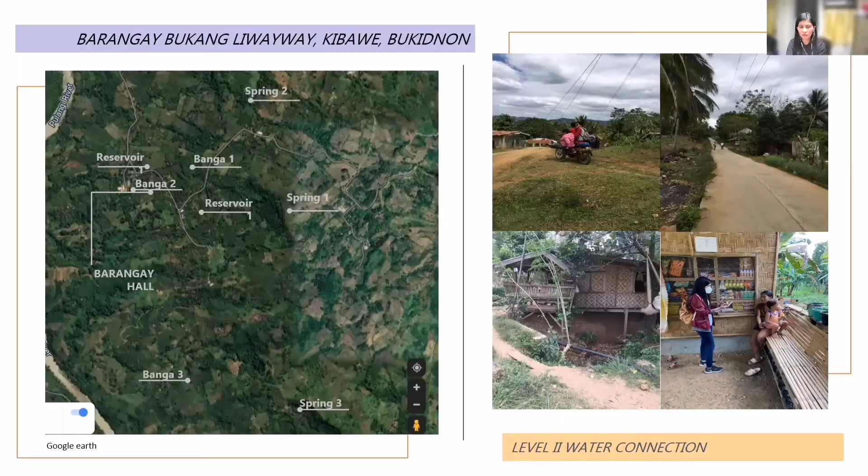To ensure the availability of domestic water in the community, an assessment of the water system is necessary. Bukang Liwayway is among the places in the Philippines that face problems with their water system. It is a geographically isolated and disadvantaged area in Kibawe, Bukidnon with a 9 out of 10 poverty ratio. Currently, the community water supply is insufficient to meet the demands of the population in the service area.

Hence, the researchers evaluated the water sources and conducted a technical assessment of the existing water system, including the main pipeline and distribution pipe network and the reservoirs. This study focused on gathering essential technical information on the water supply system in Bukang Liwayway, which serves as baseline to design a functional and sustainable water supply distribution system.

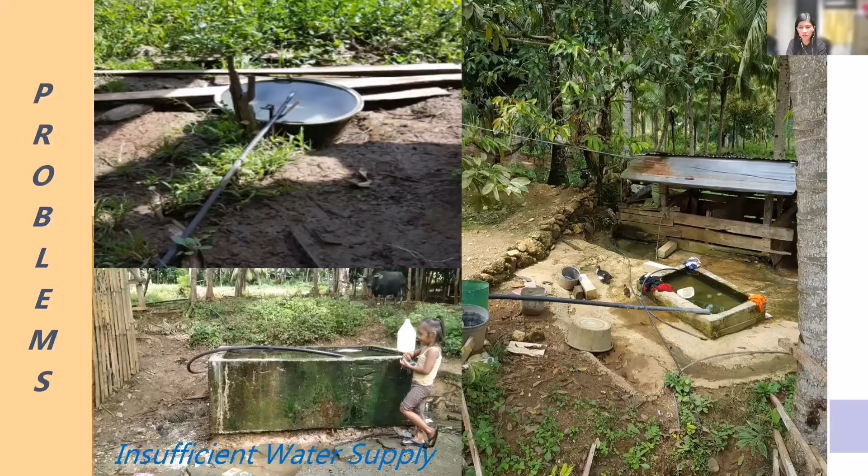In the study, there were a total of 179 respondents in the survey conducted by our team. According to the survey, 94% of respondents get their major source of income from farming, while only 6% get it from other sources. 75% of households have 1 to 5 individuals, while 25% have 6 or more. Respondents were asked about their houses' locations and distances from key water sources. The survey found that 52% lived within a 30-meter radius of the water sources, while 48% lived further away.

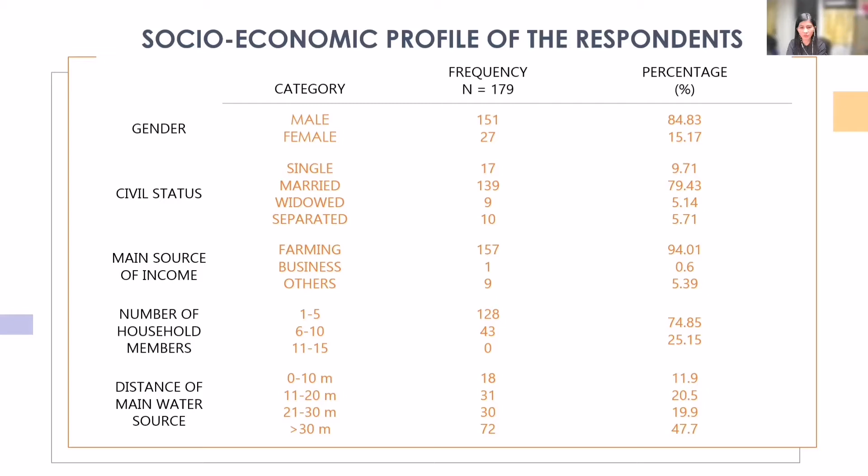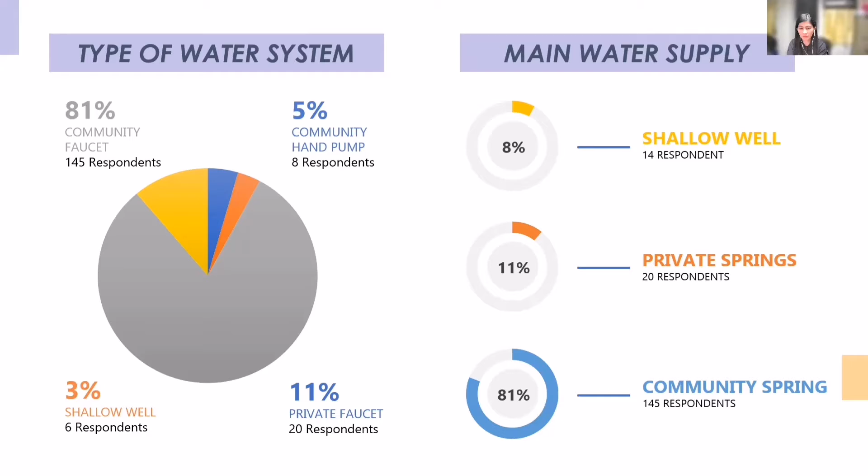When it comes to type of water system, 81% of respondents collect or fetch water from a common faucet, 11% from private faucet, and 5% from community hand pumps. And in response to the query about the main water supply, 92% of their water comes from springs, both public and private. It can be seen that 48% of the respondents are practicing rainwater harvesting during rainy season, while for the use of chlorine, only 14% of the respondents treat their water before consumption.

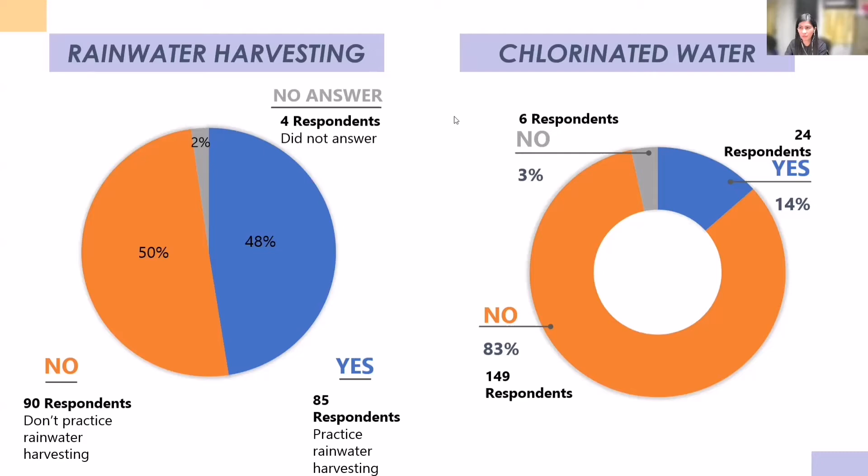When asked about the type of fecal disposal in their homes, 71% said they use a pour flush type toilet, and 22% said they use an antipolo type toilet, while 7% said they don't have a toilet at all. Regarding the question about water-related illnesses, amoebiasis was experienced by 55% of those surveyed, and it is most common in Puroks 1 and 2.

For the question about water appearance, 75% of the respondents said they frequently got clear water from the spring. And in terms of water peak hour usage, 68% of respondents indicate their most water-intensive hours are 5 to 6 a.m. or 4 to 7 p.m., and 25% say 6 to 7 a.m., and 7% mention midday.

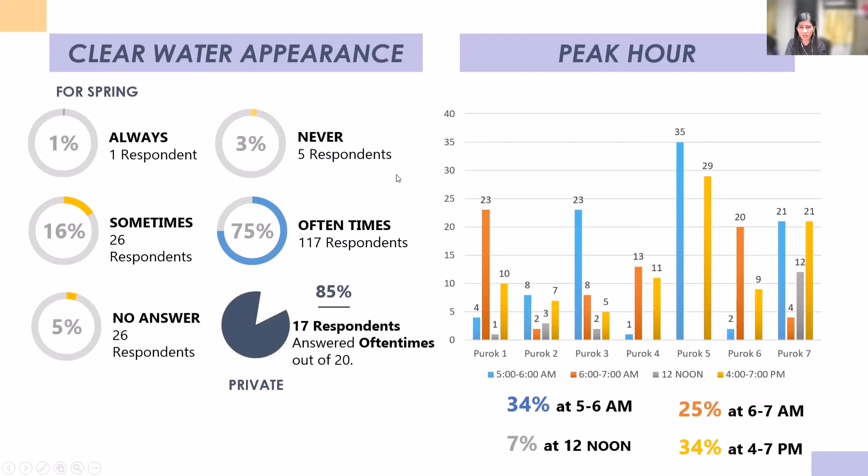Along with site survey, our team also conducted site investigation in the study area. Currently, only 2 spring sources feed the barangay's service area out of the 3 water sources. Spring 1 has an average discharge capacity of 0.434 liters per second, whereas Spring Source 2 has an average discharge capacity of 0.725 liters per second, and the community water level of service is level 2.

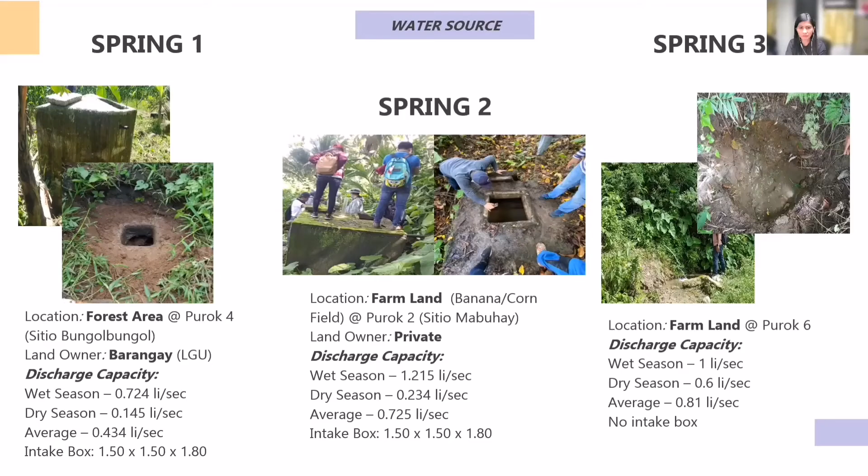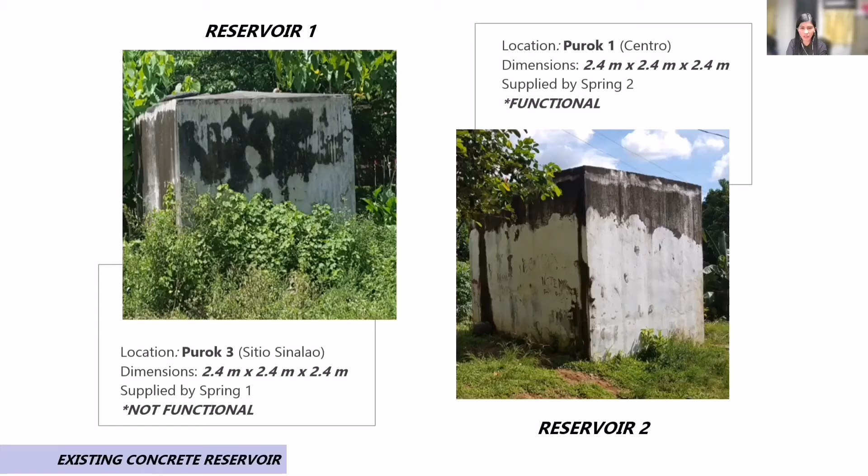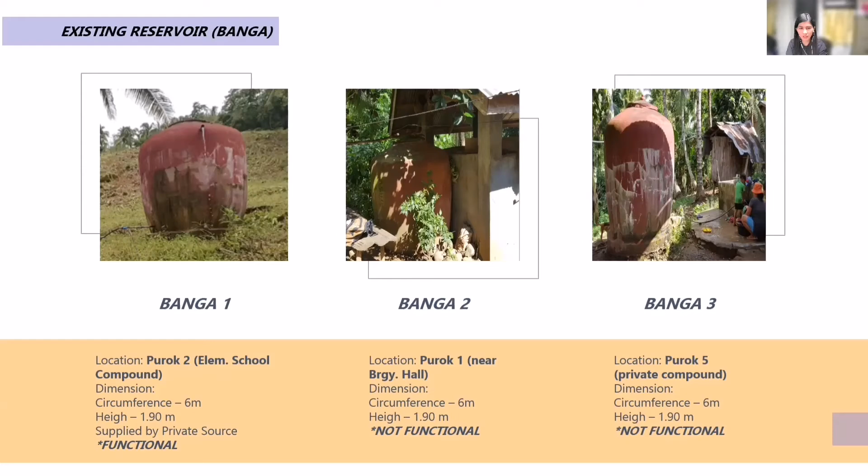Also, they have 2 rectangular concrete reservoirs. However, only reservoir number 2 is operational due to extensive damage to the water lines that serve reservoir number 1. In the community, there are 3 existing banga reservoirs. Only one is operational, located near the elementary school compound, but this reservoir is not shared with other residents because it is supplied by a private source.

As per site investigation, we found that there were pipes that were intentionally cut by some residents to divert the water supply to their houses and to their rice fields. Some pipes were heavily damaged during the rehabilitation and construction of the provincial and barangay roads. There were worn out and leaking pipe connections, which resulted in the loss of water.

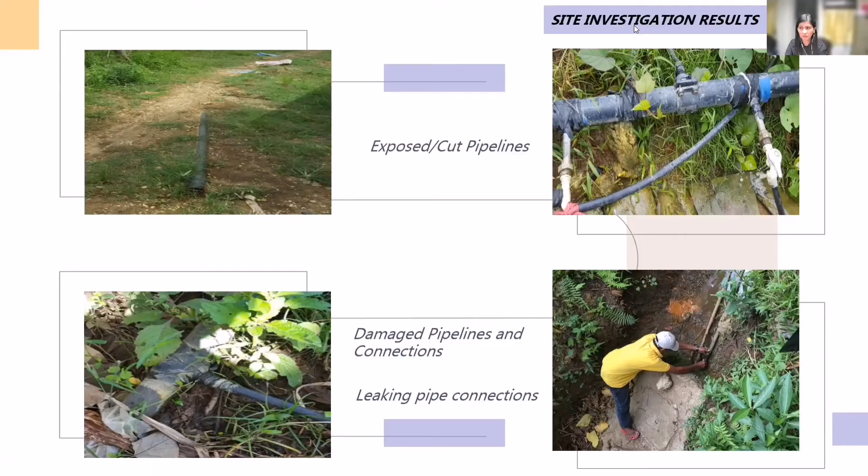These main pipelines connecting the springs and reservoir traverse through farmland and roadways. Most of these pipelines were not buried during the construction and laying, which resulted in pipe damage due to human activities in their farms and pipe deterioration as a result of prolonged exposure to various weather conditions.

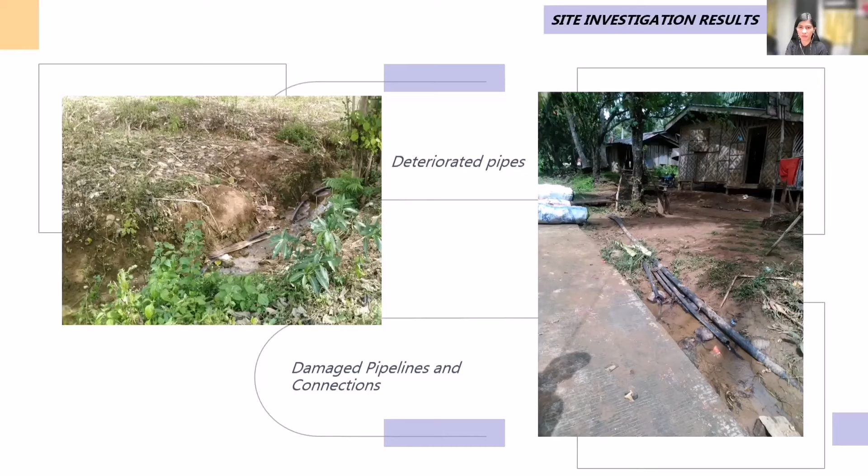After conducting the site survey and investigation, determination of the average day demand and maximum day demand were carried out. The table displays the average day demand of 20.83 gallons per minute with a maximum daily demand of 27.08 gallons per minute. The computed ADD and MDD was based on the typical domestic needs of water of 50 gallons per capita per day.

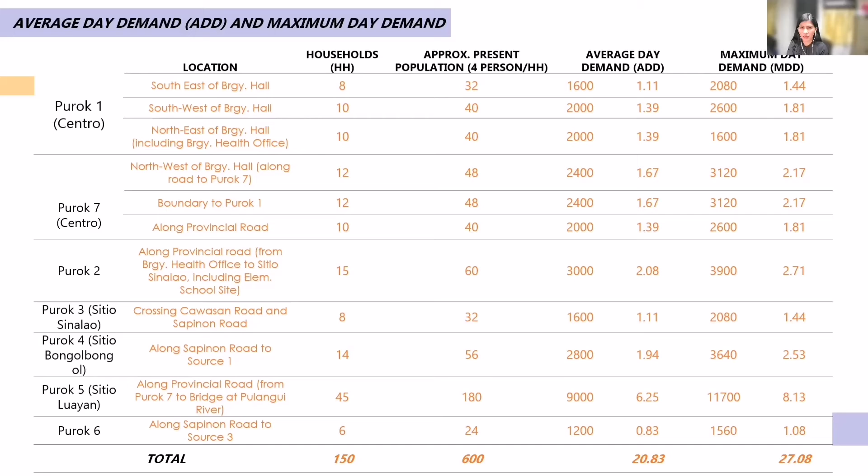Finally, the table shows the spring capacity versus the average daily demand. It can be seen that during dry season, the average daily demand is 20.83 gallons per minute, while the combined average water discharge of the 3 spring sources is only 15.52 gallons per minute, which means that there is water shortage during dry season.

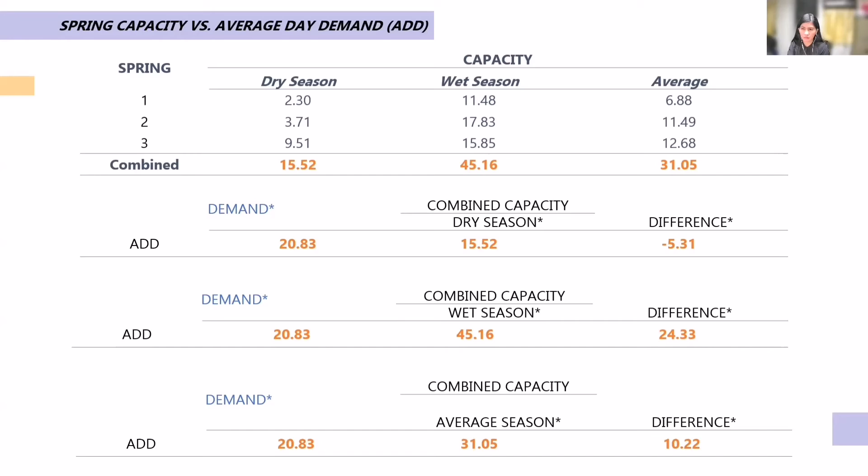Based on the assessment conducted, the following conclusions and recommendations were made. First, the water supply system in Bukang Liwayway is very poor. Hydraulic structures such as intake boxes, reservoirs, and community taps exist. However, not all of them are operational. Second, the water system in the barangay is prone to contamination. Aside from the deterioration and exposure of the pipelines to the ground, 29% of the households in the community have unsanitary fecal disposal.

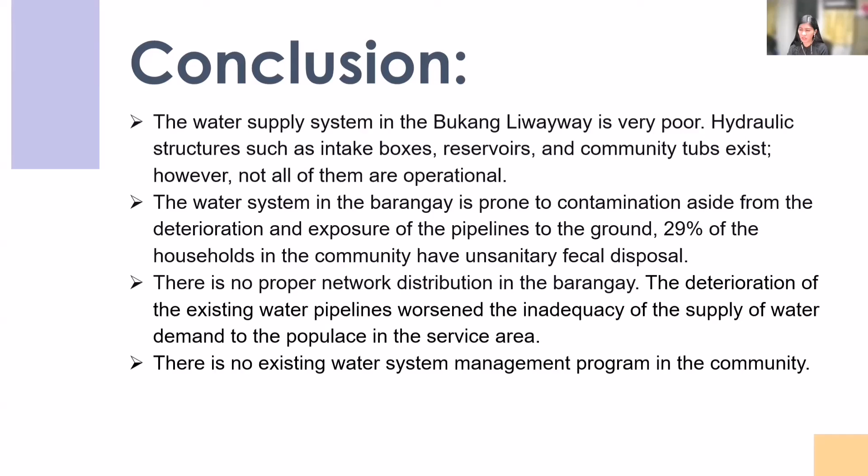Third, there is no proper network distribution in the barangay. The deterioration of the existing water pipelines worsens the inadequacy of supply of water demand to the populace in the service area. And fourth, there is no existing water system management program in the community.

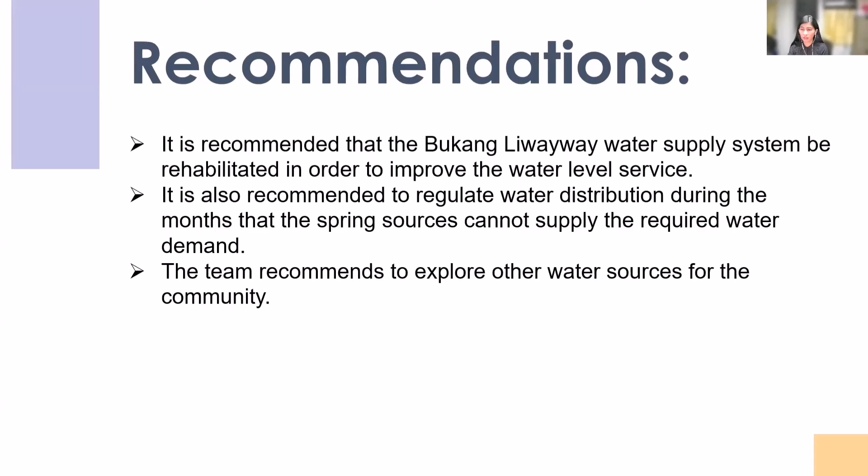And for the recommendation, it is recommended that the Bukang Liwayway water supply system be rehabilitated in order to improve its level of service. It is also recommended to regulate water distribution during the months that the spring sources cannot supply the required water demand. And finally, the team recommends to explore other water sources for the community.